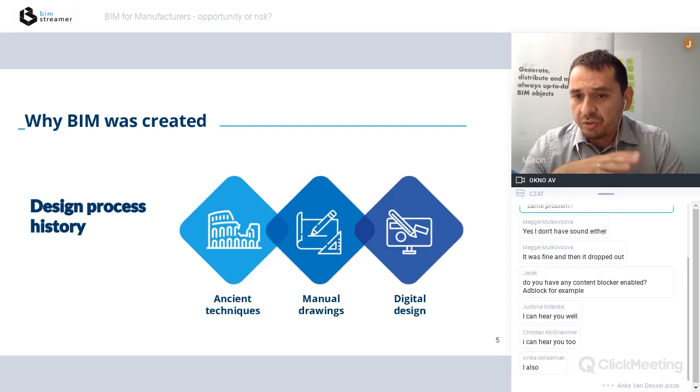Jacek, maybe if you unmute yourself, maybe now the audience would be able to hear you. I can hear you well. I just asked the participants if they have any content blockers that might disable the sound. I have experienced such an issue before. All right, so maybe if anyone else has issue with the sound, because some of the participants are actually hearing it and some of them don't. I tried another browser and the problem is solved. Anke mentioned that one of the participants switched to a different browser and it started working. So Microsoft Edge might be a solution if it doesn't work on Chrome or another browser, I think.

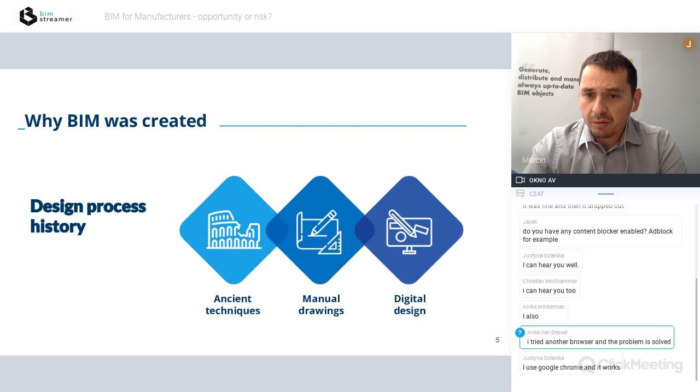All right, so shall we continue? Has anyone else had any issue with the audio? Okay, taking silence as no. Google Chrome has solved the problem, as one of the participants mentioned. Information to all the audience: in case you have any issue with the audio, please try to switch to a different browser, as some of the participants already hear it.

All right, so let's get back to our presentation and let's try to understand why BIM was actually created. So let's start with some history classes.

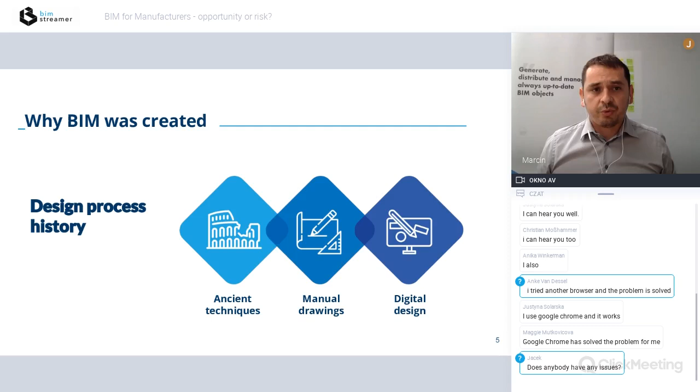So during the ancient time, the process of designing a structure was severely simple. It was designed in the head of the designer, and once the design was finished, it was transferred onto some piece of paper and then handed over for execution. It was relatively simple, and the process actually didn't change that much up to today.

Of course, during several decades, or even centuries, of evolution, we've managed to come up with additional tools, like the gigantic drawing boards that you might be familiar with, which used the rapidograph.

And then in the 70s, during the third industrial revolution, the PC computers were so common that the construction industry invented the tools called computer-aided designs, known as CAD systems. But the process of design didn't change that much ever since.

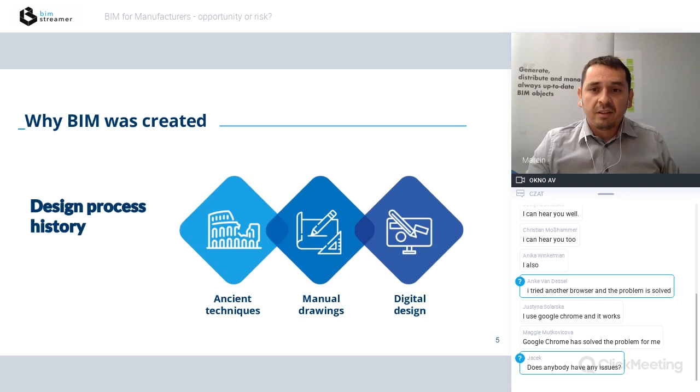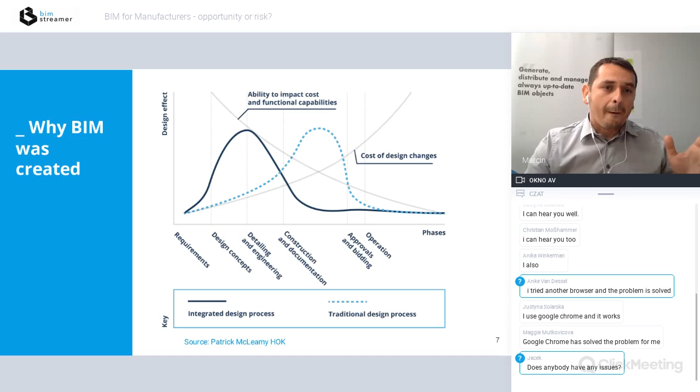This, in the long run, allows us to better control the budget and reduce the cost related to introducing changes. So, what is actually BIM? Most of you may think that BIM is strictly focused on 3D geometry. But BIM, as the name states, is not only the models, it's also the information. So, since we're talking about BIM for manufacturers, let's focus on the information which might be relevant from the manufacturer's perspective.

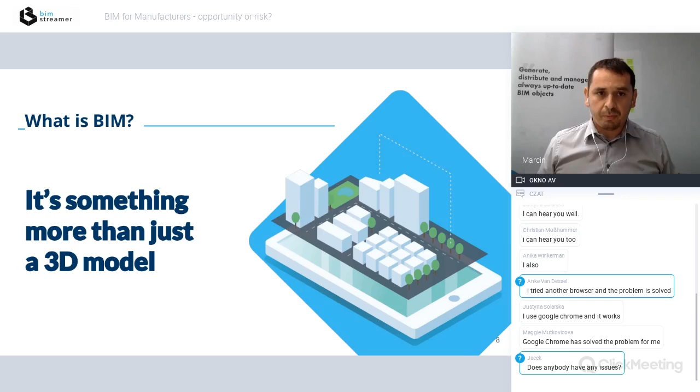So what kind of information can we have inside BIM? Of course, we can have our product sheets, quality certificates, technical approvals. We can also parameterize our products, especially if we're dealing with products which have several variants, which may involve components, geometry, and attributes of the products. We should be able to parameterize that, and BIM can provide it to us.

Moreover, we can provide additional product information like descriptions, attributes, classification systems specific for specific markets, which can be very usable for those who would actually use this object. And last but not least, we can include marketing information. So we can include our unique selling points, called USPs, or even pricing. So this is actually something which can start triggering our sales.

So what are the facts around BIM currently? Most of the reasons why BIM was actually invented were to put designers, or in general the AEC sector, on the ground. I had a friend who is an architect, and he told me once that before the BIM era, designers were dealing with something pretty much abstract. They were dealing with lines. Currently, with BIM, they need to deal with objects. So they are dealing with walls, slabs, beams, roofs, windows, and so on.

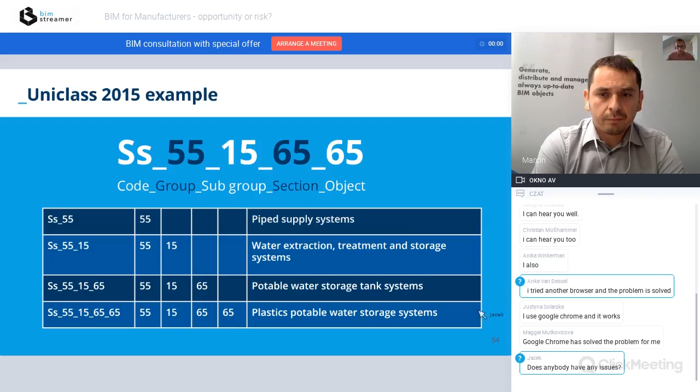The subgroup number 15 narrows it down to water extraction, treatment, and storage systems. The following number section tells that we are talking about potable water storage tank systems, and in the end, the last object number specifies it as plastics potable water storage systems. Looks pretty easy, doesn't it?

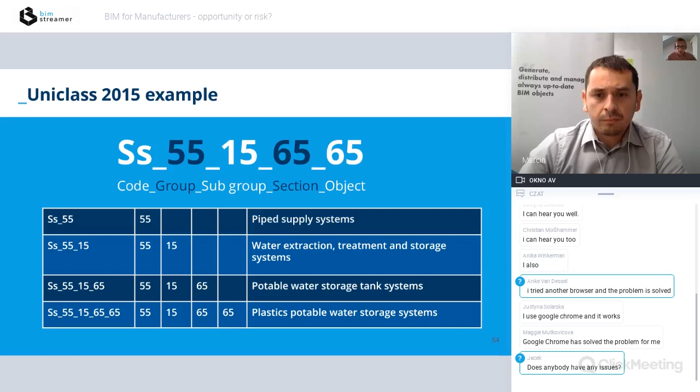The challenge is that, just as with languages, different countries and industries use their own systems of describing products. For example, ETIM-MC is a new system developed in the Netherlands, which differs in its codes from international ETIM. Uniclass is widely used in the UK, and E-class is respected in Germany. The construction industry in the United States uses Omniclass. Companies operating in multiple markets have to take into consideration, after they describe the product in a standardized way, that the models should be available with the information adjusted for the specific region, so the customers in a certain country would have the right information. And that's all about classifications I was about to tell.

All right, Jacek, thank you for explaining that. The other challenge that manufacturers should think about is how we would like to reach our target audience. Remember, at the very beginning of the presentation we were talking about different target groups, like investors, designers, of course facility managers, service professionals, or resellers. And they might actually need to be addressed separately. The service professional, for instance, might be willing to interact with our brand by going to a physical store. The investor might be more keen on using a virtual reality or augmented reality application to make it tangible, to see how the object actually looks, while the designers might be more keen on using either the manufacturer site, BIM portals, or even some BIM plugins to collect the libraries which later on they could use in their projects.

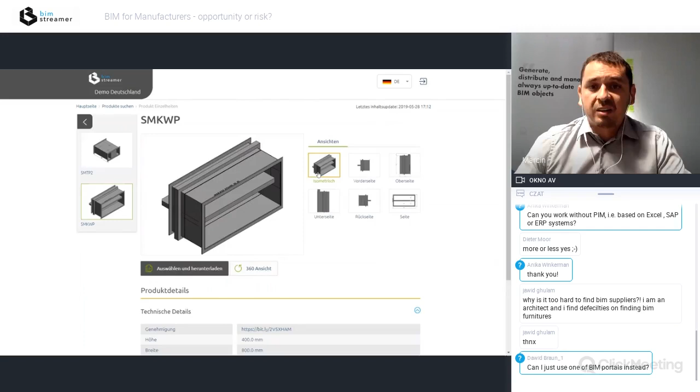So let's see what we can do with that. This is an example of the online library, which can be a part of your system. The online library, as you can see, can be provided in more than one language, can contain several pieces of information about the product, both with projections. Everything can be generated automatically, including the dimensions that you're seeing right now.

The users of such an online library can download files, and you can be informed who downloads what in order to know which products are most popular, which less, in which regions, and so on. And last but not least, if you have this kind of BIM portal or online library available on your site, and you're not restricting yourself to just using the external BIM portals, you're starting to promote your channels. You're collecting your data, and you're becoming the owner.

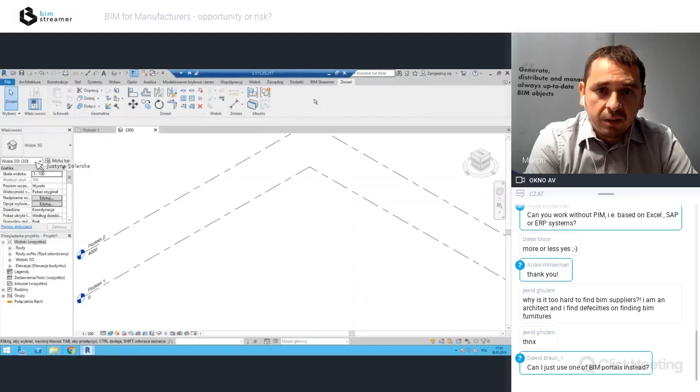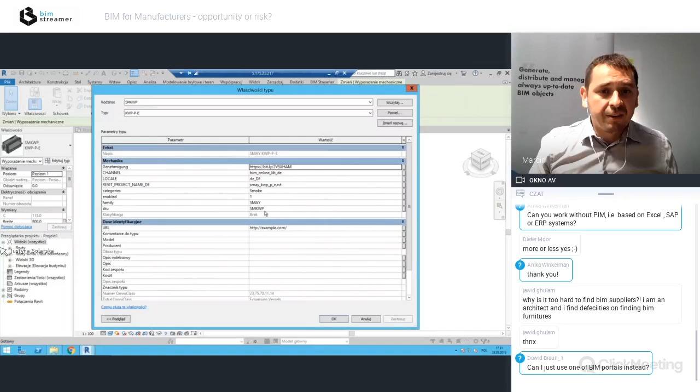Apart from the online library, you can also provide your BIM files through a set of plugins. You can have your own plugins, which one of the participants also asked about, which can contain configurators and selection assistants specific to your product portfolio. And because you're sharing neither the online library nor the BIM plugin with any other vendors, you're able to adapt it to match your needs and your product portfolio needs. And as a result, simplify the designer's work, which we wanted to focus on.

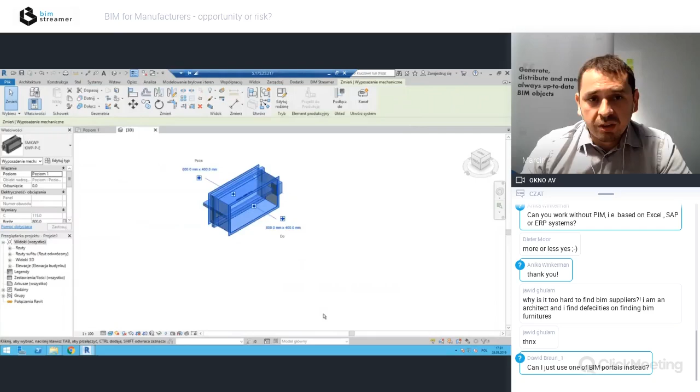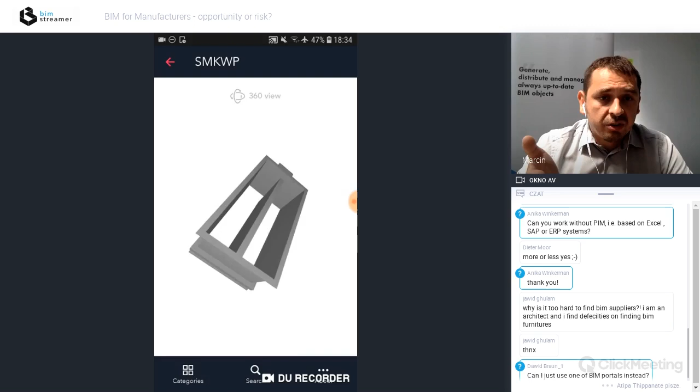But of course, we were talking about the designers. Let's try to focus on a different segment, maybe the investors or service professionals. So we could, for instance, have a mobile application which can also be connected with our omnichannel strategy, which can show a specific product portfolio in specific languages, classification systems, and so on. It can also provide information like 3D geometry, as you can see right now, these drawings, which were also generated, something like a 360-degree view that you can play with.

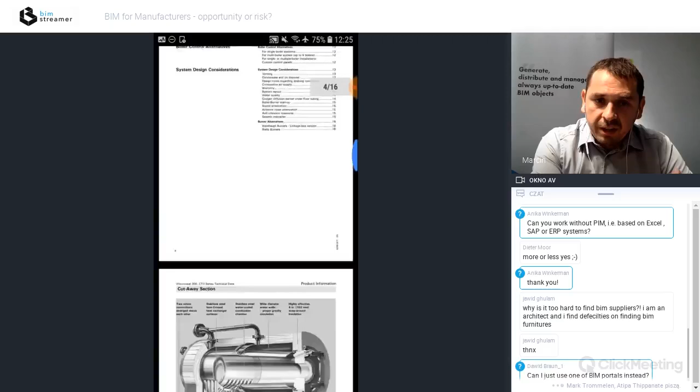So from this perspective, this is not, of course, a tool for the designers, but this could be a tool for either an installer or even an investor. And this is an example where we could show you how this kind of application could also be used as a tool for providing information. Here you see exact information about the product, like technical data, but it can also act as a marketing tool, which can be used by the investor, by the sales representative, or during fairs to present it to the customer.